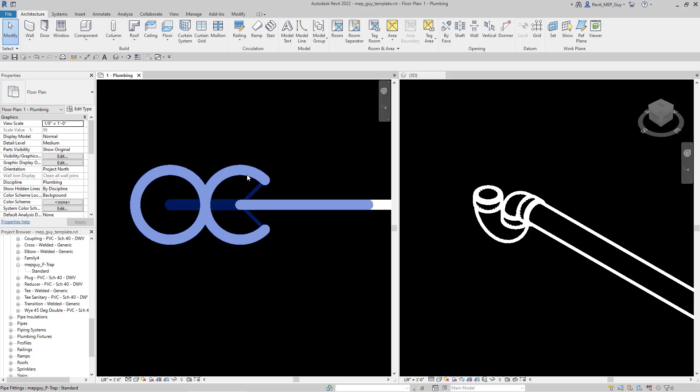And at the end of the video I'm going to show you guys how to download this P-trap family that I've created. So like always guys, we're going to start a new project.

I'm going to choose browse. I'm going to use a plumbing default project. We're going to hit OK. Start drawing some pipe. That looks good. Let's drop it down to maybe 5 feet and then we'll just end it right here. We'll hit escape. Let's go ahead and look at this in a 3D view.

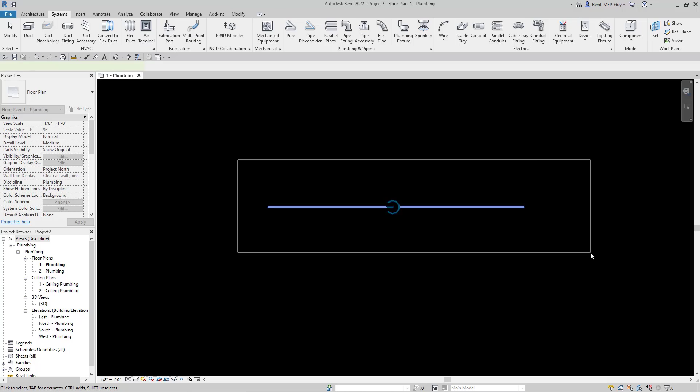So we'll select it. Use the section box. We'll zoom in on this. We'll change the display to fine. We'll just get rid of the section box by hiding the categories, and we'll get rid of the level as well. Now that I have my pipe drawn, I just want to explain something to you guys.

So P-traps come out of the box as a multi-port type of fitting. But what we really want to do is we want to be able to use a P-trap just like an elbow. And that's why we're going to go ahead and change our P-trap to an elbow. But the first thing we have to do is load in this P-trap family.

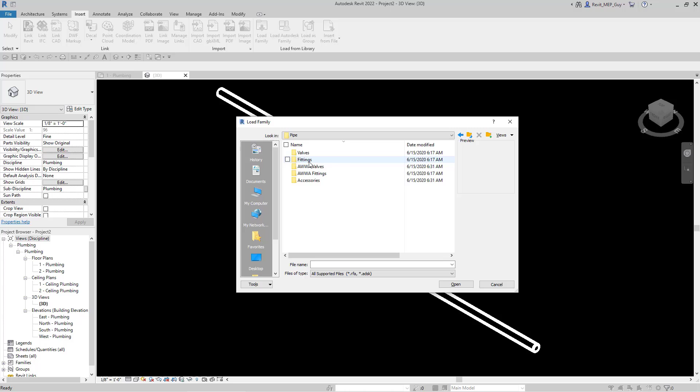So let's go to Insert. Let's go to Load Family. Go to where you keep your family files. English Imperial. Go down to Pipe Fittings or Pipe. Then go to Fittings. PVC, Schedule 40, socket type DWV for drain waste vent, and then we'll scroll down to this Trap P PVC Schedule 40 DWV. Click it and hit open.

Now Revit has loaded the P-trap into the project, but we need to select it so we can edit it. So the way to select a family that's not in the view is we can go and right click on families, click search, and we're going to search for anything that has trap in the name. So we'll hit next, and the first thing that comes up is this trapezoid, so we'll hit next again, and there's our P-trap family that we loaded in.

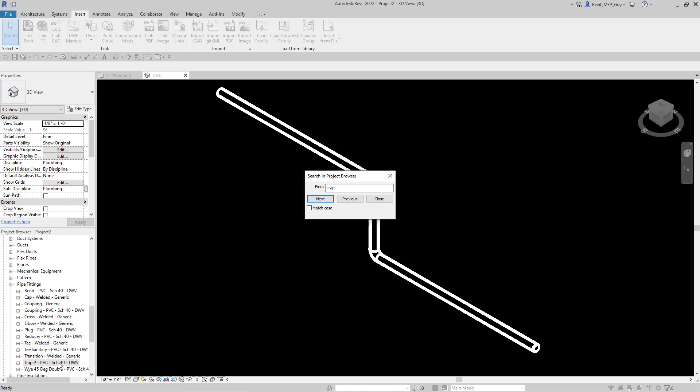So we can close this, we can right click on our family, and then we can just click edit, and that will bring up the family editor. So now that the family is open, all we have to do is set this part type right here. We're going to change it from multi-port to elbow. And basically what that does is it just makes this fitting act like an elbow.

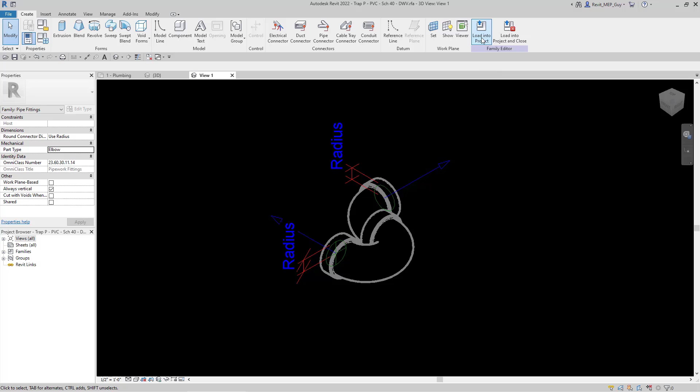So we'll load it back into our project and close. I don't need to save the library file, so I'm just going to hit no. And then it's going to ask if we want to overwrite the existing version of the one we loaded in before. So we're going to overwrite the existing. So now that that fitting has been loaded in and it's now an elbow, we can select any elbow we want in the project. So we'll select this one.

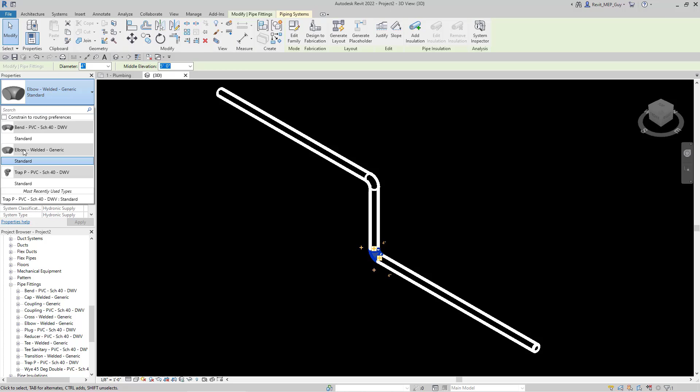And then we can click this family drop down right here. And as you can see, Trap P PVC is now one of the options as an elbow. So we can just change it right here. And you need to make sure that constrained to routing preferences is unchecked. If this is checked, that's not going to show up. So we have to uncheck it, and we'll click this standard button. And a P-trap just pops right in as an elbow. So that is the way you change a P-trap to an elbow.

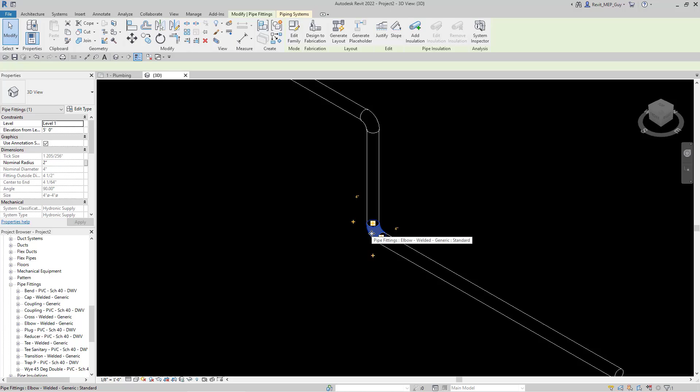Now, I want to show you guys some little things that happen with Revit. We'll just turn on our thin lines, and I'm going to go ahead and delete this P-trap. Now, sometimes you'll connect some pipe. We'll just trim these pipes back together. And this time I'm going to try to do the same thing. We're going to select the elbow. We're going to go to the drop down, and we're going to change it to standard. And as you can see, Revit has put the P-trap in backwards.

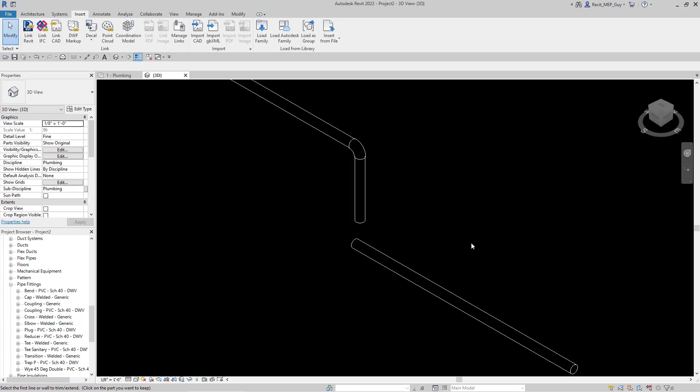And this is tip number 1. When you're drawing pipe, it does matter which way you draw the pipe when you're working with P-traps. So there's 2 different things you have to keep in mind. If you are trimming your pipe, you always have to trim the horizontal pipe first and then the vertical. So when I use the trim command, TR, if I trim my horizontal and then my vertical, and then I change the fitting, everything will work perfectly. But if I trim from my vertical to my horizontal, that P-trap family will come in backwards or upside down.

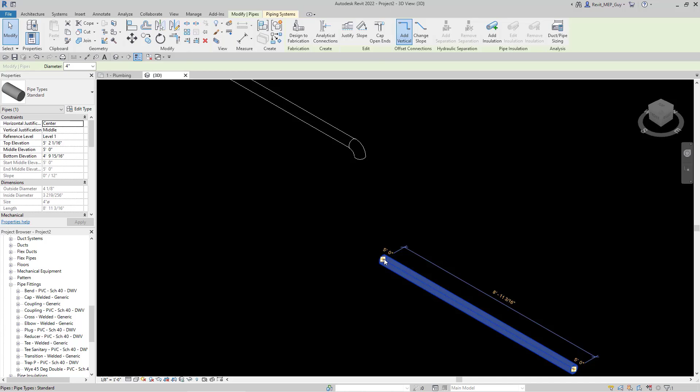Okay, here's another little tip. I'm going to delete this piece of pipe. I'm going to start from my horizontal. So I'm going to select this, and we're going to right click, and we're going to draw a pipe, and we'll just move it up to that 9-foot marker and hit apply.

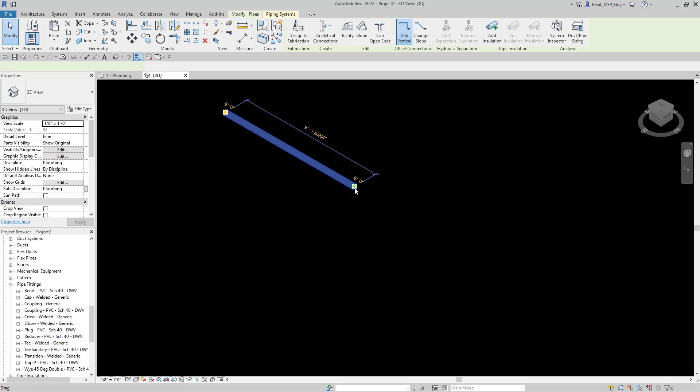And now if I change, again, you're going to see the P-trap get drawn in incorrectly. So when you're drawing your pipe, you have to make sure you draw the vertical portion first and then the horizontal portion. So if I'm drawing my pipe from this point right here, if I right click and draw pipe, and let's drop it down to 5 feet, and then we'll just move it over here. Since I drew it from the vertical down to the horizontal, and then I go and change this to a P-trap, Revit will draw the P-trap correctly.

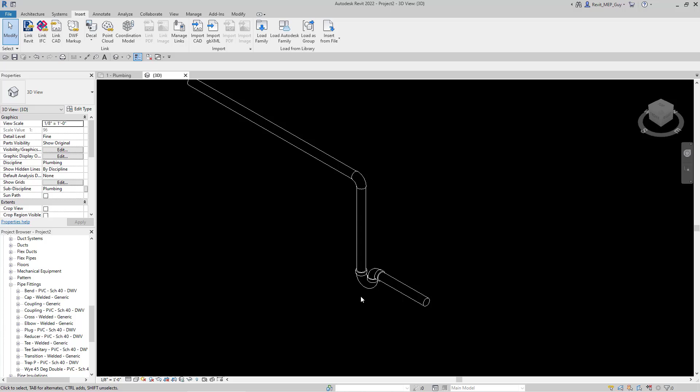So you just have to make sure that you are drawing your pieces of pipe correctly for Revit to make your P-traps orientation correct. So if this did come in incorrectly, go back. If it did come in like this, I would just delete it, trim, horizontal to vertical, and then select this, and we'll change that to a P-trap. So you guys just have to make sure you are doing that correctly. I just wanted to explain that a little bit.

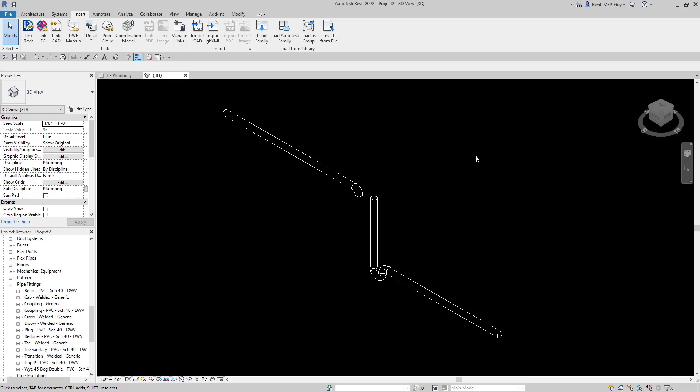So now I'm going to show you guys some more really cool tips and tricks for working with P-traps in Revit. So let's go ahead and delete all of our pipe by selecting it, delete. Let's go back to our first floor, and we're going to draw some floor drains. So let's go to Systems, Plumbing Fixture. We'll go to our drop down and we'll just search for drains. We'll use this 6-inch strainer and 4-inch drain.

And right away there's that can't symbol, and Revit's saying click on a host or face, and right now it's saying place on vertical face. A drain doesn't go on a vertical face, so let's change this to maybe a work plane since we don't have any floors. And let's just click a drain point right here. You're going to see a warning that none of the elements are visible. Usually that shows up when the view range is incorrect. So let's change our view range to make sure that we can see our floor drains.

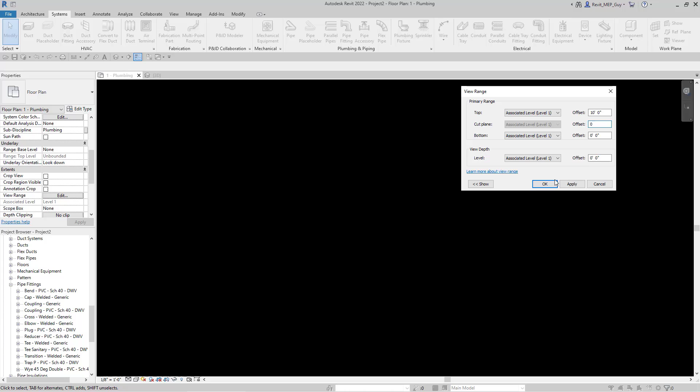So let's click on edit. And for this, I'm just going to make my bottom unlimited. Okay, we could also change our cut plane to 0. So I'm going to hit apply. So changing the cut plane to 0, now it's cutting through that drain so we can display it. The next thing I'm going to do, I'm just going to change my bottom from level 1 to unlimited. Now I'm just going to select my drain.

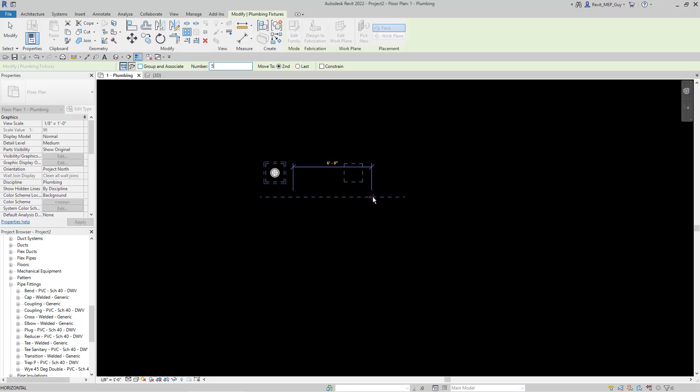I'm going to use the array command, and let's array this 5 times. So I'm going to go up to here, make it 5. I don't need group and associate for this, so let's just go to about right there. Let's hit escape. Let's select all of our drains. We're going to hold control, and we're just going to drag these drains over down here to about right there. Then I'm going to use shift and my arrow keys to just make a little offset right here. So now we have 10 drains in this orientation right here, maybe for showers.

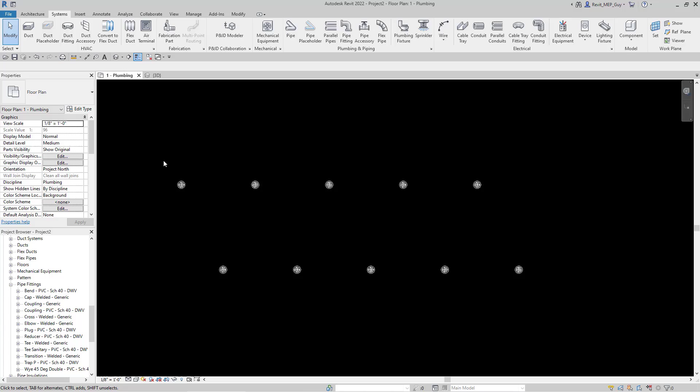So the first thing we'll do is we'll create a system out of all these drains. So let's just select all of them, and we'll go up to here and click this piping button, which creates a piping system. We'll just use the sanitary system that Revit displays, hit OK. And now I have a sanitary system with my floor drains. So let's use the generate layout command up here to draw some pipes with these drains. We're going to place our base, and we're just going to place it maybe right here.

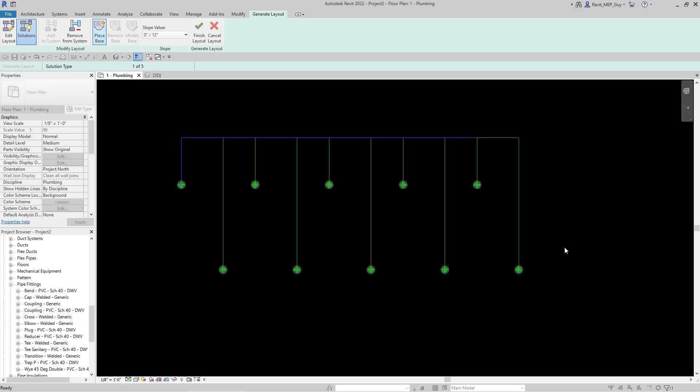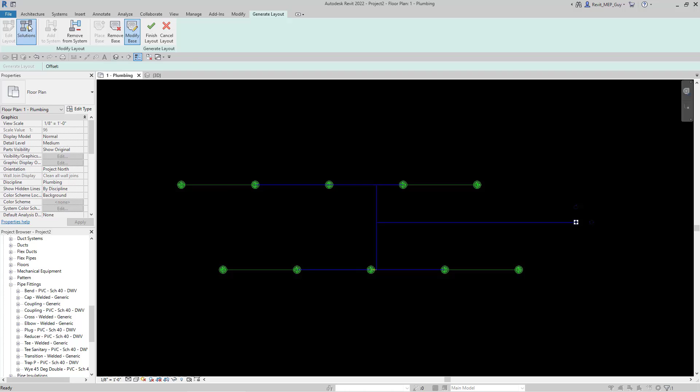And the first thing I'm going to do is change my diameter to 4 since we are using 4-inch drains. And I'm going to make my offset -2 because the piping is going to be below the floor. So let's go -2. It's always a good practice to use about -2 feet when you're using drains. So let's go to solutions, and let's pick a solution that we think might be right. Maybe something like this. Now I want to look at this in a 3D view so I can really see what's going on. So I'm going to open my 3D view up.

So as you can see in the 3D view, that's not what we're looking for. We want these to be at -2 as well. So let's change those by going to settings. Let's make our offset -2. Let's make sure we change our pipe type to PVC. Let's change our branch as well to -2. Change our pipe type to PVC. Hit OK. And now things are looking much better.

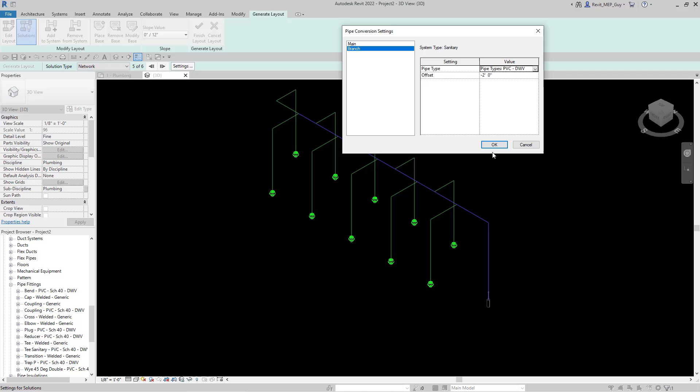And let's just hit this finish layout button and see what happens. Now that looks pretty good. Revit did a good job of connecting all these pieces of pipe. As you can see, our T's are going in the right direction, and everything looks pretty good. Now all we have to do is select all these elbows. So instead of selecting them one at a time, what we can do is select one of them, and we can right click and go to select all instances, visible in view.

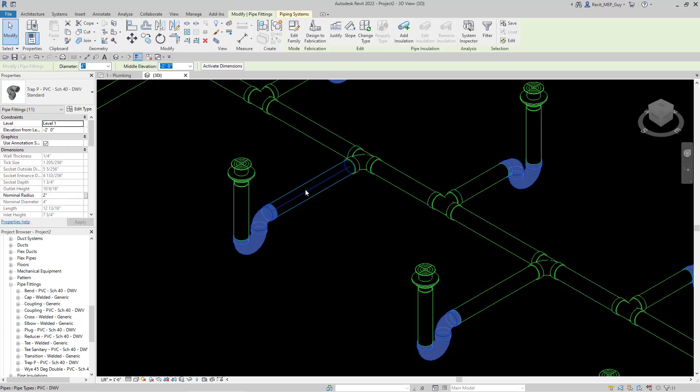And that will select all the elbows visible in this view. So let's go to our drop down, and let's just change that to trap P or P-trap. And Revit automatically creates P-traps for those elbows. Now it did work and draw them the correct way because we drew it from our fitting, which was that vertical piece, down to our branch. So Revit was drawing it the correct way when it did the auto routing, and the P-traps come in correct

as well. Now we do have a problem over here, so what we're going to have to do is just select this P-trap or elbow and then change it to a regular standard elbow. And that looks great right there.

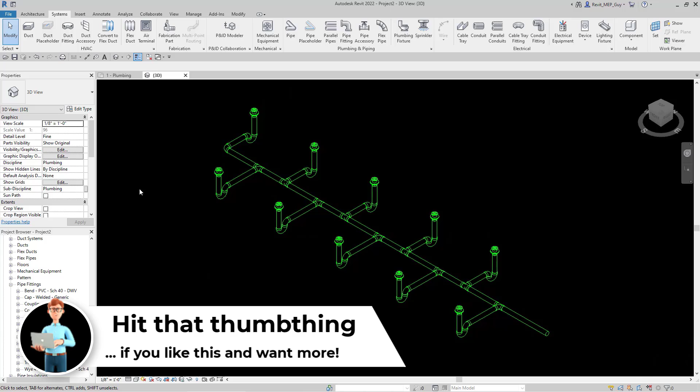Now I want to show you guys another way you could have done that. Let's say you have more stuff in the view and there's elbows around in your project, so maybe there's a better way. Let's try that again. Let's go back and select all this piping network. We'll click it. Then we can go up to here to filter, and we can select only our pipe fittings. So let's hit OK. And now only the pipe fittings are selected.

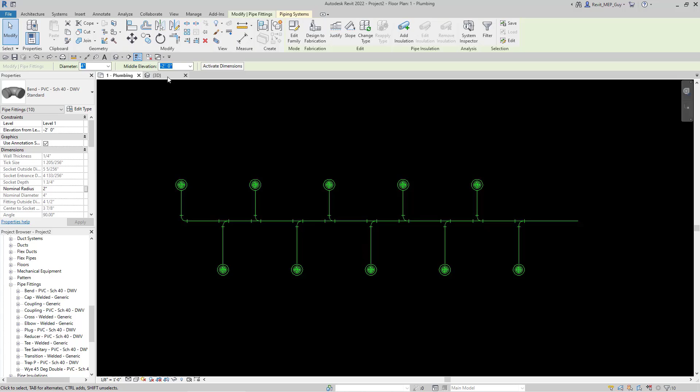So let's go to our floor plan, and now all we would have to do is hold shift and just deselect our T's in the middle of the pipe. So let's go back to our 3D. Our elbows are all selected, so let's just change them to a P-trap. And again, Revit is doing everything for us nice and quickly.

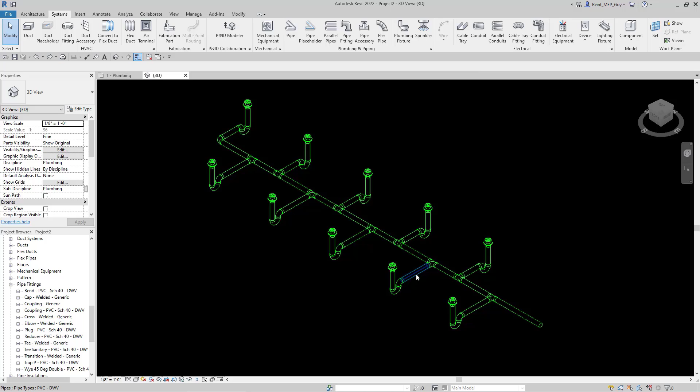Now the last technique I'm going to show is a pro technique, and I haven't used it a ton, but it is very beneficial to know how to do this very quickly. So what I'm going to do is temporarily change my routing preferences for this PVC pipe. So I'm going to select some pipe, go to edit type, go to routing preferences, edit, and for elbows we're just going to select this trap P PVC, and it's just going to be temporary. So I'm going to hit OK, hit OK.

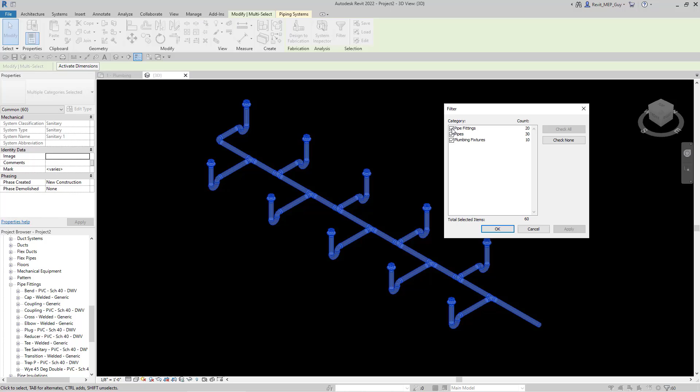Now let's select all of our pipe. We'll use the filter command and deselect our plumbing fixtures. Hit OK. We'll delete all this piping. We'll tab into our system, select it. We'll generate the layout, go to our floor plan, place our base, place it about right here.

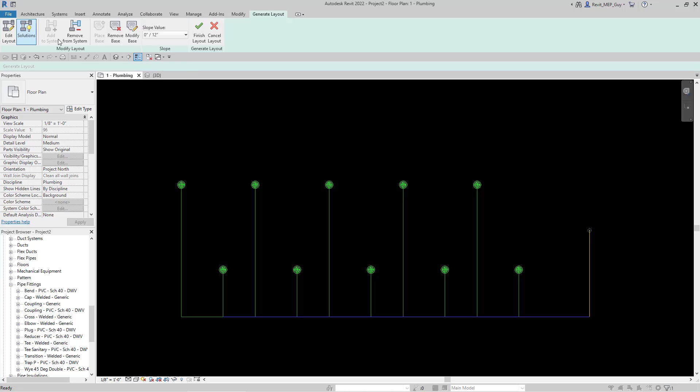Go through the solutions. Well, let's actually modify this base because we need to make it at -2. Let's go to solutions, go back to our 3D view, and we'll cycle through. That one looks good. Make sure we have the right settings, PVC, PVC, hit OK. And now when we finish this layout, all the elbows will be automatically converted to a P-trap.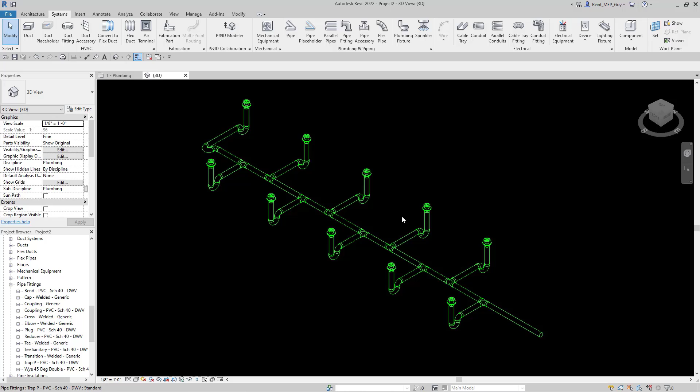So I'm going to click Finish Layout, and as you can see, all the elbows got automatically converted to a P-trap. So all we have to do is select this P-trap right here, change it to a standard elbow, and then what I would make sure I want to do is select a piece of pipe, go to Edit Type, click Edit, and make sure I change the elbow back to this bend PVC.

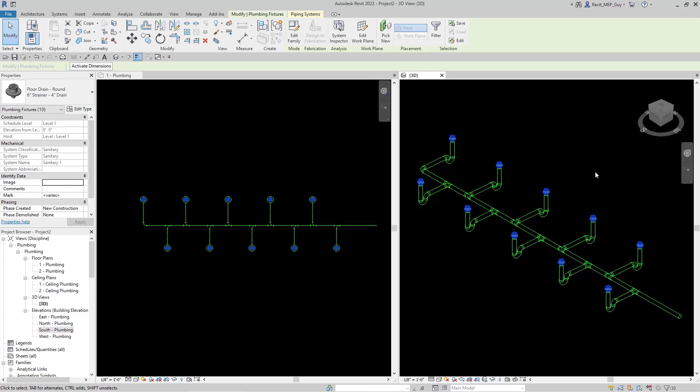Now you guys can see that the 3D view looks pretty good and everything looks great, but in my floor plan view I don't really have any P-traps showing. So I'm going to show you what a typical drain layout would look like by just deleting all of these drains. So let's right click, select all instances visible in view, and let's just delete them. So this is what a normal drain and P-trap sanitary system would look like.

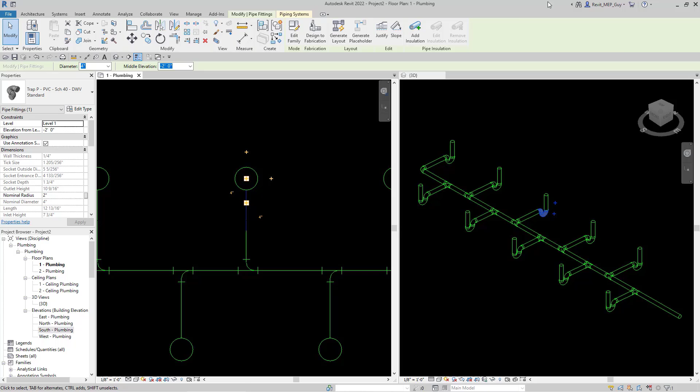So we really want to show P-traps right here. So if I select one of the P-traps, right now it's not displaying it correctly. So I'm going to show you guys how to use the P-trap that I've created to make things display a little better. So I'm going to load that P-trap in by going to Insert, Load Family. So I made this little family folder, and this is the MEP Guy P-trap, so we're going to open it

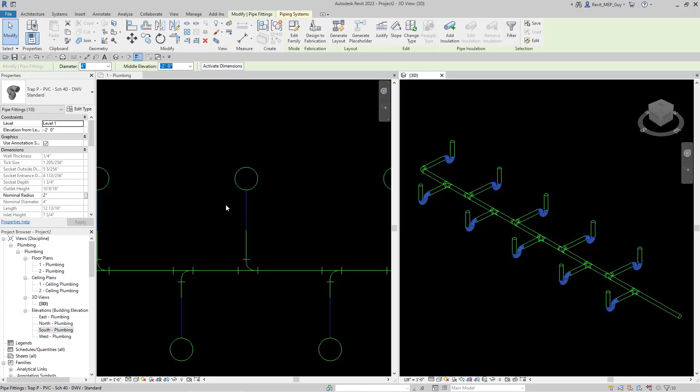up. And now that it's loaded in, let's just select all of our P-traps by right-clicking, select all instances visible in view, click the drop-down, click MEP Guy P-trap, so let's just deselect all those, and look at that, everything's looking great. Now these are the types of P-traps we would like to see in a floor plan when we have a sanitary sewer network or something. We want to see something that looks like this.

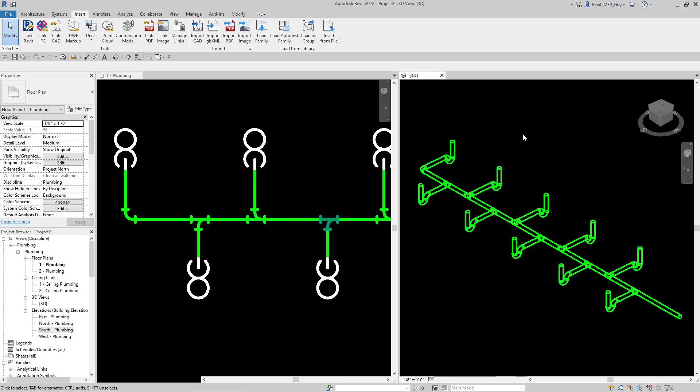So what you need to do, it's very complicated, and I did make a video that's not doing so great right now, but I have a video on my website that explains how I put these symbols inside this P-trap,